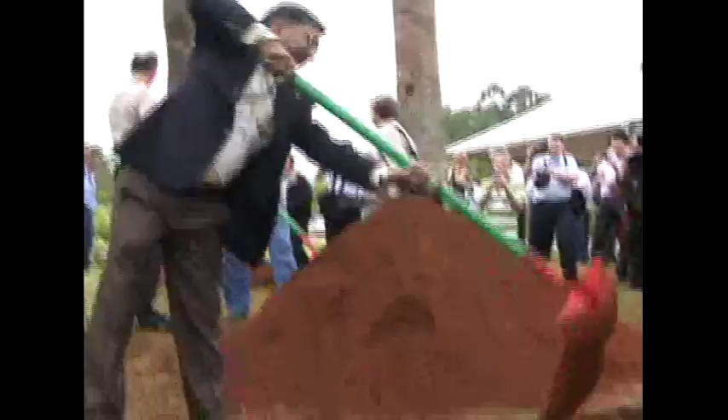The delegates received a warm Brazilian welcome to Araxá. Children from the local school greeted the international visitors with traditional Brazilian songs. And then the guests were invited by CBMM to plant a tree to commemorate their visit. This is customary for all CBMM's visitors, and everyone was encouraged to return to Araxá to visit their tree.

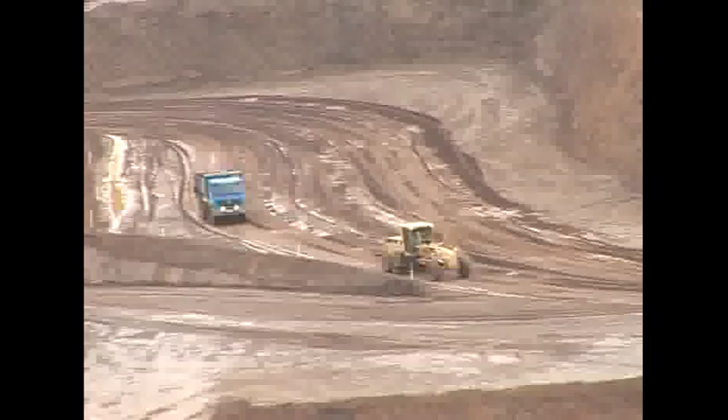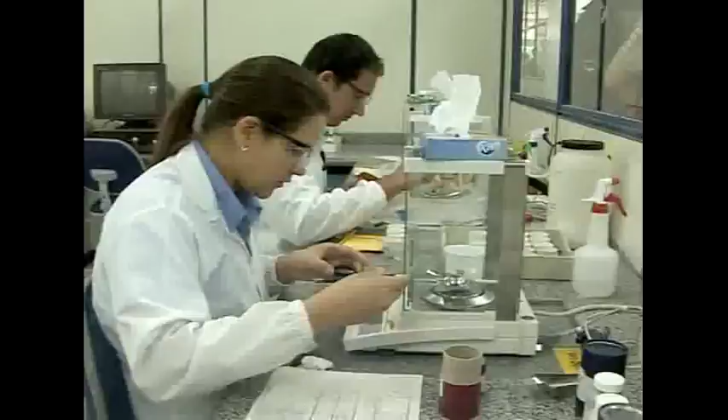A tour of CBMM's facilities followed, where delegates saw the mine, the world's largest deposit of niobium ore. This was followed by a tour of the mill, processing plant, and research and technology center. They saw the whole process from extracting the ore to the final products: ferroniobium, niobium oxide, and pure niobium. CBMM's Conservation Center and Chinese Garden were also a feature of the tour.

The seminar program included a formal dinner with entertainment from Groove Allegro, a fusion of samba, choro and orchestral music. And ended with a trip to Rio de Janeiro, where the delegates could relax and enjoy the sights including Sugarloaf Mountain and the Corcovado.

The seminar was officially opened by Tadeu Carneiro, who welcomed the delegates to Araxá. In total, during the 3-day seminar, 26 papers by 77 authors were presented on topics ranging from microstructures to projects involving thousands of kilometers of pipelines. During the official opening of the conference, Tadeu Carneiro made a special presentation to Dr. John Malcolm Gray from the Microalloyed Steel Institute in the USA for his long-standing support of CBMM and his promotion of niobium technology during the past 50 years.

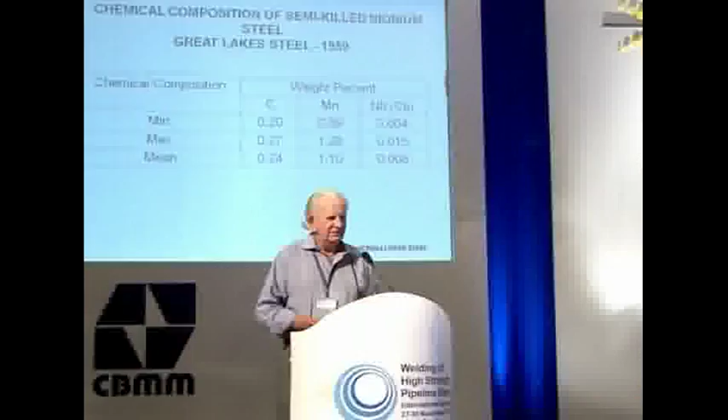Dr. Gray then set the scene for the seminar by presenting a paper detailing the history of the use of niobium in line pipe steels. The story begins back in 1959, when a small addition of niobium, less than 0.01%, was first added to a carbon manganese steel to allow the production of the X52 grade. At that time, a carbon level of 0.25% was fairly typical.

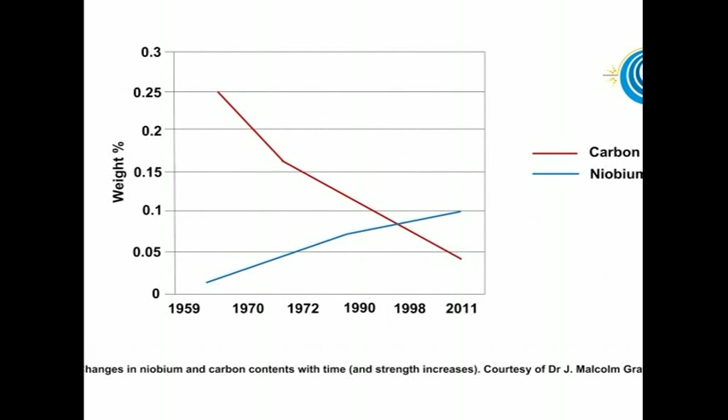But in the intervening years, advances in oxygen steelmaking, plate rolling mills, and our metallurgical understanding mean that it is now possible to produce X80 grade material at carbon levels below 0.05%. Such low carbon levels, combined with advanced higher temperature rolling schedules, allow the effective utilization of much higher levels of niobium, typically around 0.1%. Such steels are commonly referred to as HTP.

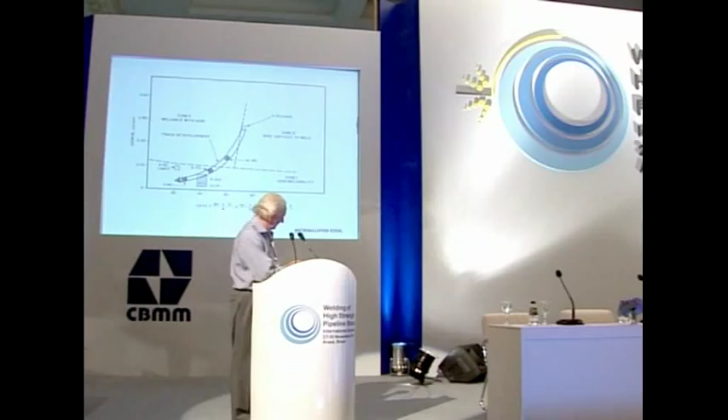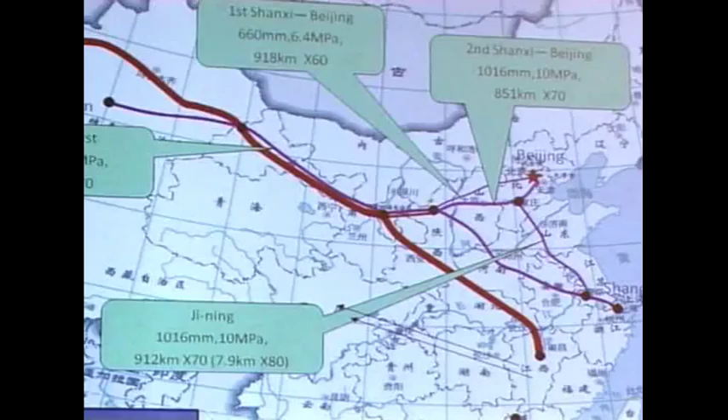Dr. Gray observed that millions of kilometers of niobium-containing line pipe steel have now been successfully installed worldwide. And with reference to the more recent advent of the X80 grade, he highlighted the dramatic progress made in China in the last 8 years, where major projects such as the second West-East cross-country pipeline are consuming vast tonnages of HTP high niobium X80.

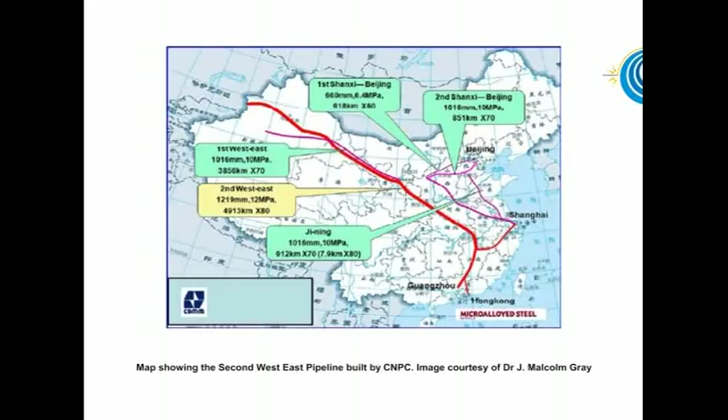The latter remarkably ambitious project, completed in June 2011, which now transmits gas at operating pressures up to 12 megapascals, incorporates some 4,913 kilometers of 48-inch diameter pipe with wall thicknesses up to 27.5 millimeters. In all, some 4 million tons of material were involved. He noted that dramatic improvements in weldability had accompanied the material developments that he had described, indicating that these would be more fully explored by subsequent speakers.

International consultant Dr. Phil Kirkwood from the UK then presented the seminar's keynote address with a paper entitled Niobium and Heat-Affected Zone Mythology.

Emphasizing the unique nature and special characteristics of the element niobium, and with reference to comprehensive studies by world experts over the past 4 decades, Dr. Kirkwood successfully dispelled the myth that niobium levels in structural and line pipe steels should be arbitrarily restricted, because some researchers had apparently concluded that the element could be responsible for the occurrence of low toughness in small regions of certain welded joints.

Dr. Kirkwood effectively demonstrated that, taken out of context, individual sets of results could readily be used to demonstrate that any of the common primary alloying elements, such as manganese or nickel, could just as easily be shown to be detrimental to heat-affected zone toughness.

More importantly, he reiterated his previously published belief that the optimum use of niobium will always occur when its incorporation into a steel composition is an integral part of a carefully tailored approach to specification, taking due account of the welding processes which will be encountered in the practical fabrication and joining of lengths of pipe.

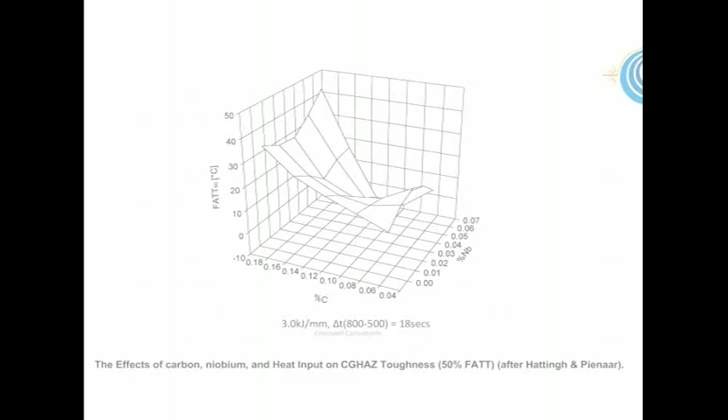In this context, Dr. Kirkwood demonstrated the powerful interacting effects of carbon, niobium, and the thermal cycles associated with common welding processes. The lower carbon levels, now associated with the most recent pipe developments, enable higher niobium levels to be utilized over a much wider range of heat inputs to produce pipes with more than adequate heat-affected zone toughness, meeting the demands of even the most rigorous fabrication specifications.

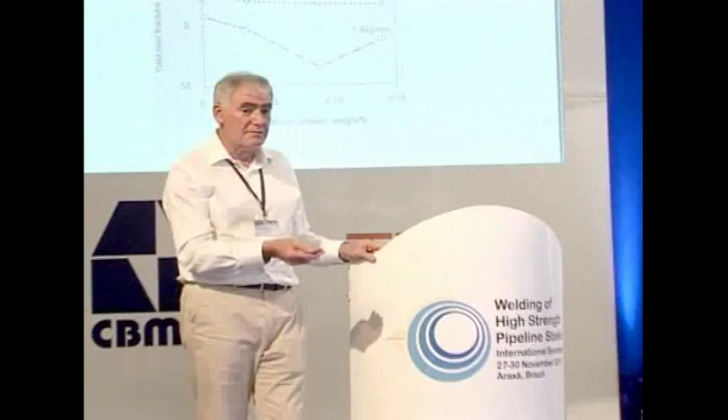Dr. Kirkwood presented explanations for his conclusions based on a widely accepted coarse-grained heat-affected zone toughness model, which had been developed several years ago. His address continued to challenge aspects of the specification of toughness requirements for small microscopic regions of welded joints, and this was subsequently more fully explored by other presenters later in the seminar.

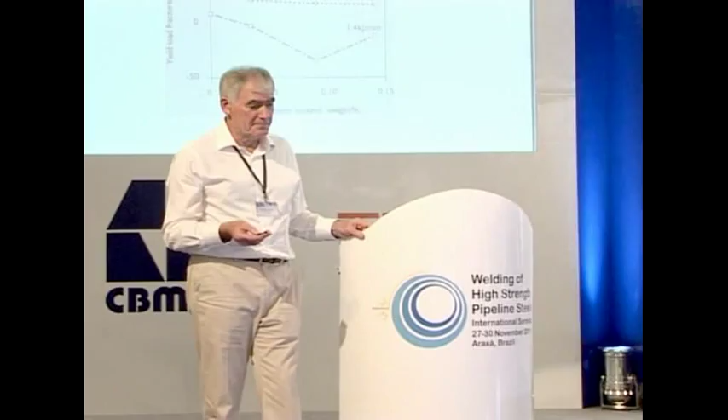Concluding his remarks, Dr. Kirkwood reminded delegates that the progress made by the adoption of the new HTP technology required progressive thinking and engineering, such as that demonstrated by the Chinese, and he warned of the danger of being deterred by the mythologies of earlier literature.

Over the remainder of the seminar, in 4 carefully arranged technical sessions, specially invited world experts on all aspects of the specification, manufacture, field welding, and fracture behavior of high-strength line pipe steels addressed the seminar. At the end of each session, a panel discussion provided a structured opportunity for delegates to question individual authors, and this approach proved to be highly successful in generating open and frank dialogue.

Undoubtedly, one of the key outcomes of the seminar was the demonstration that a remarkable degree of consensus already exists in respect of many of the most important facets of the science and engineering required to optimize the use of the new generation of higher strength niobium-containing line pipe steels.

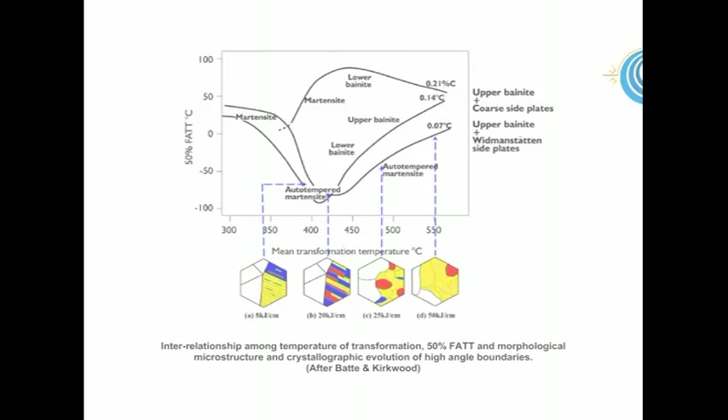Dr. Kirkwood had shown how adequate heat-affected zone toughness could be achieved, and further interesting contributions by Professors Shang of Beijing University, Bhadeshia of Cambridge University, and Cochrane of Leeds University significantly added to the science of the subject by improving our understanding of why certain types of microstructures were tough while others were not. Several authors at the seminar, including Professor Shang, presented microstructural analysis using the relatively novel electron backscatter diffraction (EBSD) technique.

Professor Bhadeshia presented an interesting account of the way in which martensite-austenite (MA) constituent develops in heat-affected zone microstructures, and demonstrated how chemical composition and basic transformation theory could be used to predict its nature and volume fraction. As discussed in Dr. Kirkwood's keynote lecture, Professor Bhadeshia observed that MA was an inevitable consequence of the displacive bainitic transformation, and his explanation supported the view that carbon, and probably silicon, could increase the volume fraction of MA.

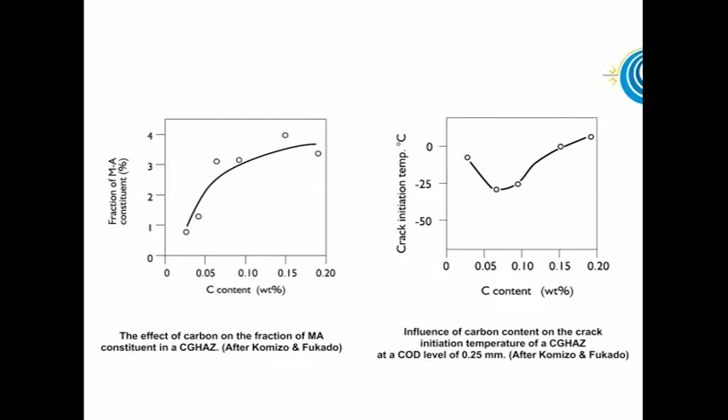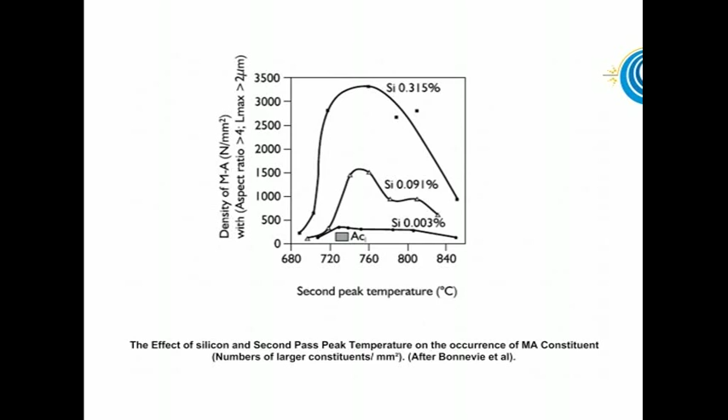Although claims have been made in the literature suggesting that niobium may promote increased levels of MA, this contention is not supported by either Professor Bhadeshia or Dr. Kirkwood's studies. Dr. Kirkwood concludes that if this is an area of concern, the simplest solution is to reduce carbon and silicon as in the HTP steels. This approach reduces MA to the lowest possible levels.

Amongst other papers concerned with the role of microalloying elements on heat-affected zone toughness, an interesting contribution came from Li, Fletcher and co-authors from Australia. The paper, presented by Huijun Li from the University of Wollongong, explored the effect of titanium to nitrogen ratios in niobium-bearing line pipe steels. He concluded that so long as titanium remained below 0.06%, there was no justification for specifications to demand titanium to nitrogen ratios below the stoichiometric value of 3.42. Further important contributions were made by Frantov, Militzer, Manohar and Guagnelli, and the co-authors of all these contributors.

The outstanding Chinese successes with high niobium HTP type X80 steels, which were referred to earlier by Drs. Gray and Kirkwood, were described in detail by Professor Shang and also Madame Zhao of the China Petroleum Pipeline Research Institute. Professor Shang attributed the Chinese success not just to the availability of new, more effective steel processing equipment, but to their willingness to accept the challenges of the new emerging materials technology. And Madame Zhao emphasized the importance of the development and optimization of field girth welding procedures.

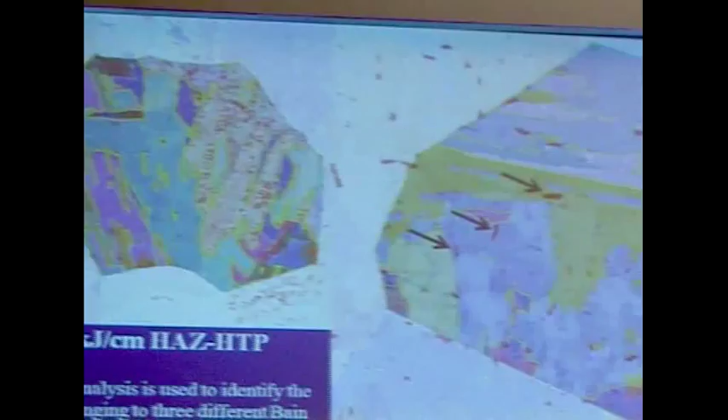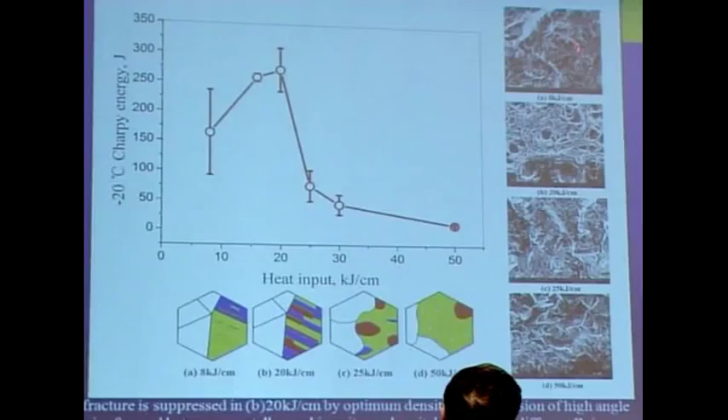Professor Shang confirmed that it was the Chinese's ready acceptance of the pioneering work in North America and their confidence in the contemporary metallurgical development work which convinced them to set aside the arbitrary restriction of niobium to a maximum level of 0.06%. The latter figure is still currently embedded in the relevant API and ISO specifications. For the major X80 projects already alluded to, they produce their own specification to allow up to 0.11% niobium.

This approach was supported by other key speakers, such as Dr. Krishnan, an eminent consultant from India, who had been instrumental in enabling similar progress in respect of niobium levels in Engineers India Limited specifications for X80 pipe material for the Gas Authority of India.

Dr. Noop, in discussing the manufacture and supply of large-diameter helically welded X80 pipe in Germany, also emphasized the advantages of the HTP approach, indicating that the relevant Euro norm for steel pipes for combustible fluids, which also limits niobium to 0.06%, is no longer sustainable and must be revised. Reporting on the outcome of a 3-year European project which assessed the potential of steels with higher niobium levels, consultant Dr. Webster also advocated the rationalization of world specifications and supported Dr. Noop's contention that the appropriate pipe steel's Euro norm was in need of urgent revision to embrace the new HTP technology.

He suggested that with low-carbon steels, evidence from the European project supported his own belief that specifications could safely permit niobium levels of up to 0.15%, and supported Dr. Kirkwood's conclusion that the new higher niobium approach was ripe for technology transfer into the fields of structural, shipbuilding and pressure vessel steels. Dr. Webster felt that the first step should be the revision of the Euro norm for thermomechanically rolled structural steels to permit niobium levels well above the current limit of 0.06%, and in principle he could identify no technical barrier to niobium levels up to 0.15% in low-carbon steels.

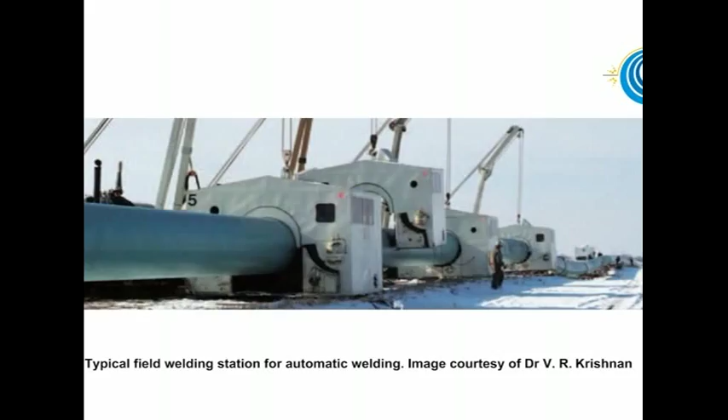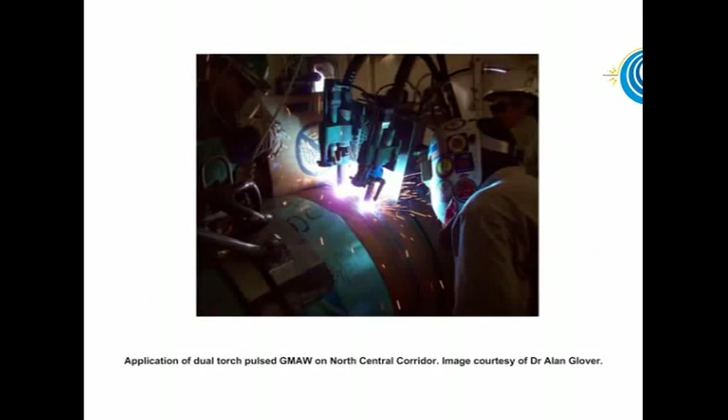In papers by consultants Drs. Glover and Krishnan, the relative costs of pipe material and construction were explored. Depending on the specific project, material costs can account for between 25 and 40% of overall project costs. But in Dr. Krishnan's experience, pipe construction costs are dominant and can easily be up to $1.5 million per mile of completed pipe. These factors together support the drive towards higher strength pipe, such as X80, and reduced wall thicknesses to reduce the volume of weld metal required in the field and permit installation in the fastest possible time using high-productivity multi-arc GMAW processes.

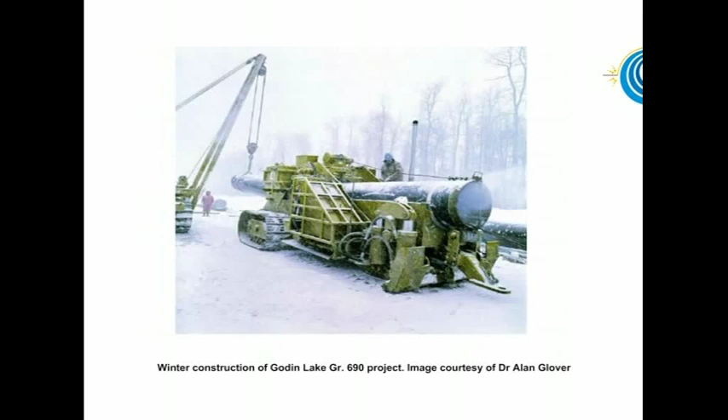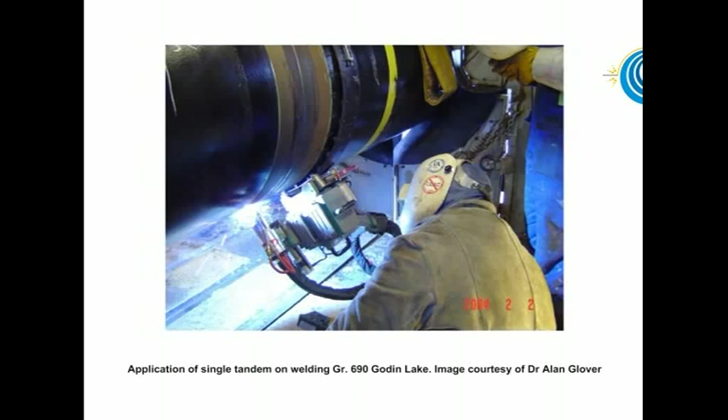Drs. Glover and Krishnan and Professor Shang alluded to the possible use of X100, which had already been pioneered in a small pilot project in relatively hostile conditions in Alberta, Canada. It was agreed that any potential global move in this direction would be driven by the economies of scale if the particular project allowed full advantage to be taken of a higher operating pressure. The material and welding technology already exist, and Dr. Krishnan confirmed that there is at least one major project under serious consideration by a consortium in India.

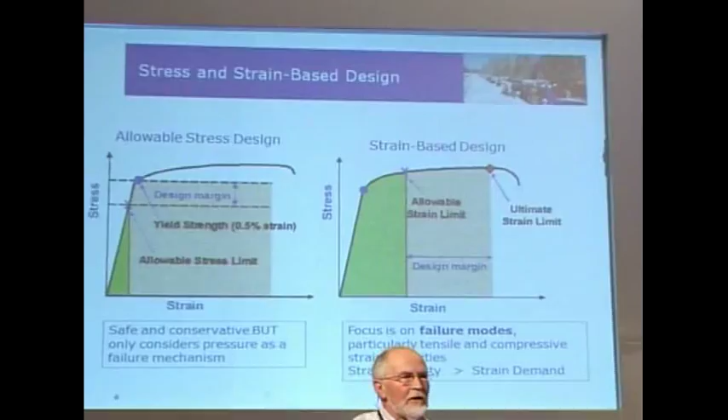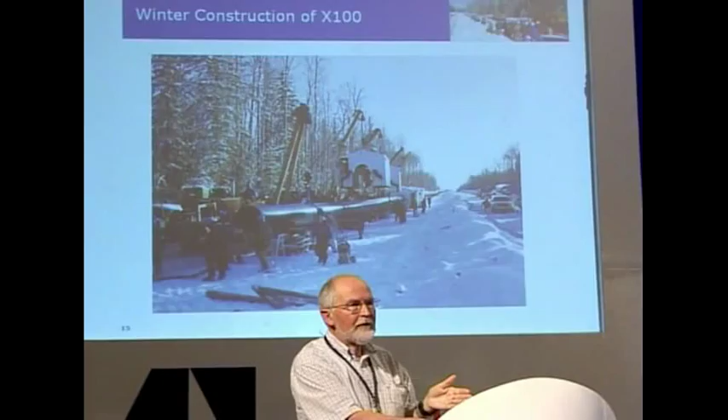Higher pipe strengths have the potential advantages of lower tonnages, lower material costs, reduced handling costs, improved field logistics, and reduced welding costs. However, Dr. Glover observed that account had to be taken of the significant reduction in usable ductility, which he estimated to be between 4 and 5% at X100 and between 1 and 2% at X120, which would almost certainly require a pipeline design relying on crack arresters. At present, X80 appears to be the optimum approach for most major projects.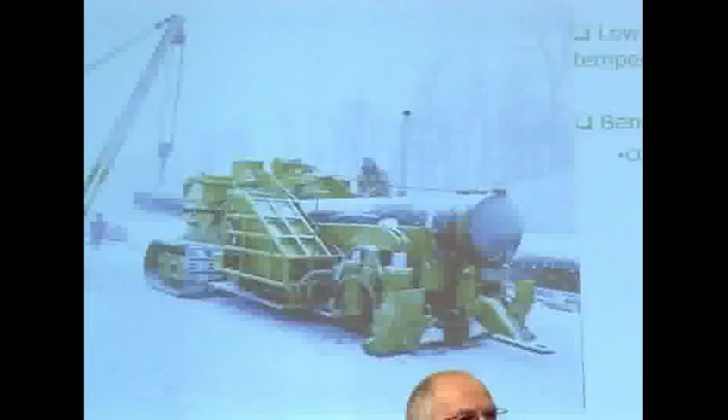Dr. Gordon from Microalloying International emphasized that the majority of existing onshore pipeline design codes are stress-based and don't properly account for situations where high strain is experienced during installation or operation. Similar observations were made by Dr. Glover, who reminded delegates that traditional design used the allowable stress design approach based on some factor of yield stress. Strain-based design becomes essential in challenging areas where the pipe might experience axial displacement and severe longitudinal loading in areas of ground instability or seismic activity. Detailed analytical papers were presented by Dr.

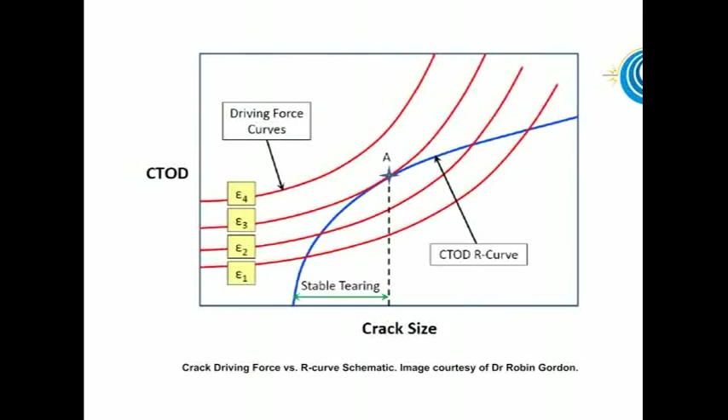Gordon and Professor Denys of Ghent University, comparing various strain capacity prediction models published by ExxonMobil, the Center for Reliable Energy Systems, and Professor Denys's own university. There appear to be varying degrees of conservatism, but the models all give weight to the same key variables and permit acceptable engineering critical assessments to be carried out for specific projects.

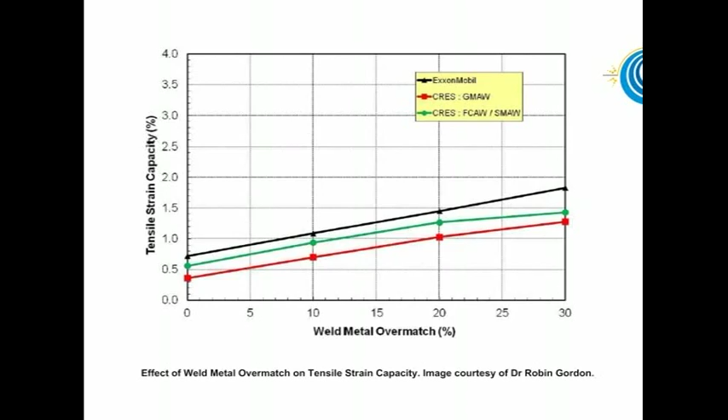The roles of small and full-scale testing were thoroughly discussed by the various contributors, and curved wide plate tests were demonstrated to be an acceptable means of estimating the strain capacity of flawed girth welds. The ability of the various models to allow for the beneficial effects of weld metal strength overmatching was highlighted.

Dr. Pyshmintsev of the Russian Research Institute of the Tube and Pipe Industry also presented some valuable results from full-scale hydraulic tests on large-diameter microalloyed steel pipes, which suggest that the fracture behavior of defects in locally embrittled zones is dictated by the base metal pipe properties. Fracture arrest behavior in spirally welded pipe is improved by the optimization of weld design.

Thanking the authors and delegates on behalf of CBMM at the close of the seminar, Dr. Carneiro astutely summarized the proceedings, highlighting the major areas of agreement and identifying challenges for the future. There is no doubt that this seminar has been an outstanding success, cementing the progress made in recent years in respect of the application of niobium in high-strength line pipe applications, and providing a springboard for future developments and the translation of the low-carbon, high-niobium technology into structural steel and other important specifications on a worldwide basis.

CBMM looks forward to hosting other such events in the future. Now let's hear from some of the seminar delegates and speakers.

Been really enjoying it. It's been a good mix of different papers, different subjects, obviously very educational, but I suppose the real test of a good conference, which this one's been, has been the extensive discussion that's occurred during the assigned sessions and obviously outside of those. And you always get more benefit from that than maybe from the actual papers themselves.